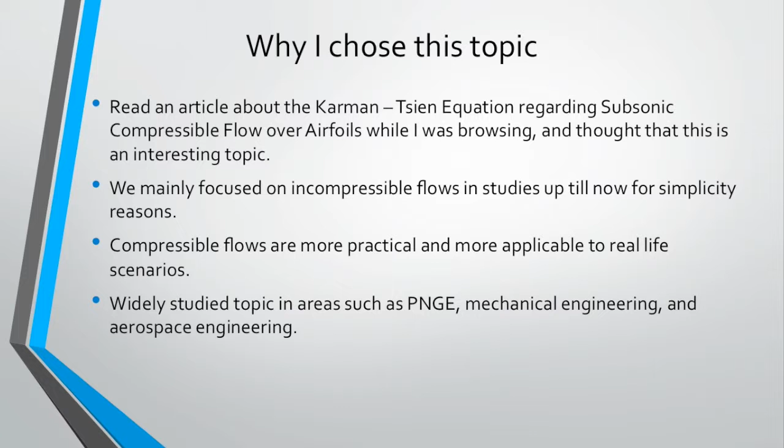Before getting into the study of compressible flow, let's first start off with some background information about compressible flow. Compressible flow, unlike incompressible flow, which deals with fluid with generally constant density, deals with fluid flows that change their density significantly, usually gas. To distinguish if the flow is compressible, one has to look at the Mach number.

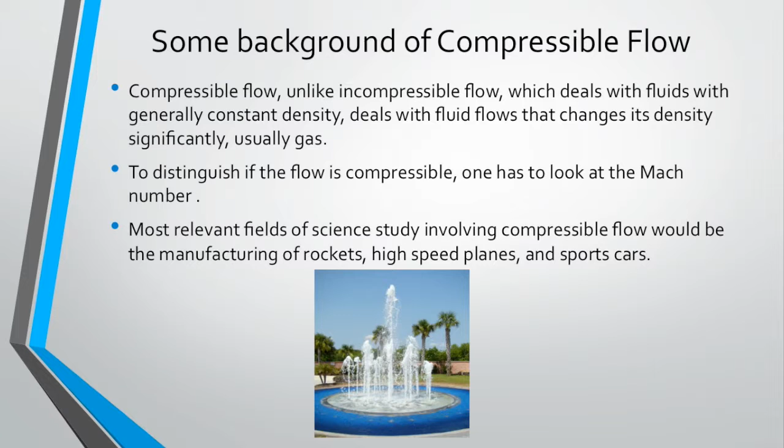Most relevant fields of science study involving compressible flows would be the manufacturing of rockets, high-speed planes, and sports cars. Referring to the picture below, a water fountain was made possible because of the incompressibility of water. If the fluid were changed to a compressible fluid, a water fountain wouldn't exist.

In the previous slide, we mentioned that we will rely on the Mach number to determine if a fluid is compressible or not. The Mach number was a significant contribution of the Czech-Austrian physicist Ernst Mach. The Mach number is a dimensionless number used to express the ratio of local velocity to the local speed of sound. It has an equation of M equals V divided by c, where V represents the local velocity and c represents the speed of sound.

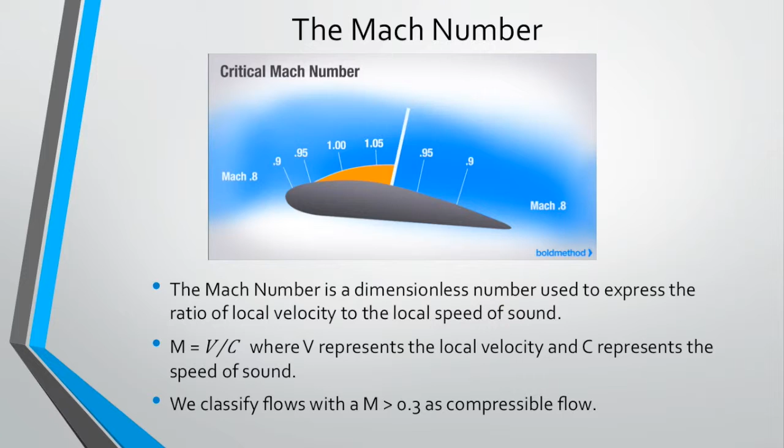Two basic phenomena of compressible flow are choked flow and shock waves. Applications of choked flow are nozzles and diffusers. As we learned previously in class, flows of high and low velocities in nozzles and diffusers are adjusted interchangeably through the restriction of the exit.

Another phenomenon would be shock waves. Examples would be sound waves created by explosions, a high-speed plane passing, and gun firing, when a wave moves faster than the local speed of sound in the fluid, in this case, air.

Referring to the graph on the lower left, a fighter jet traveling at a speed greater than Mach 1.2 would compress the air, since air is a compressible fluid, and then break the compacted air layers, causing what is known as the breaking of the sound barrier. Referring to the graph on the lower right is a classification of speeds of varying Mach numbers.

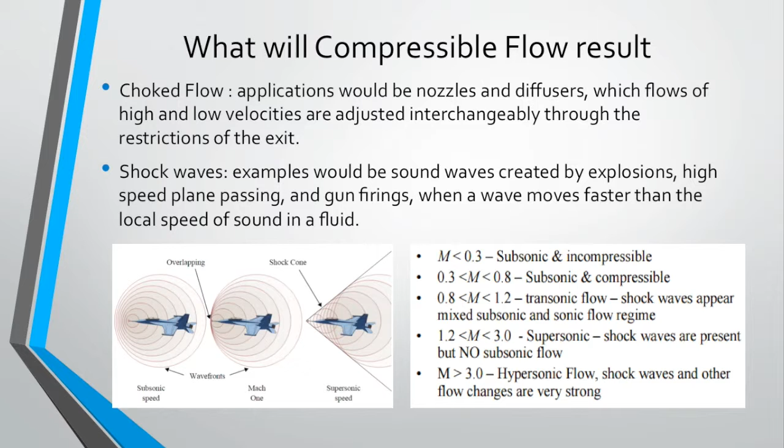There are two general classifications of compressible flow, one-dimensional flow and two-dimensional flow. We will start off with some of the basic ideas of one-dimensional flow. One-dimensional flows refer to the kind of flow that a diffuser or nozzle will give. As we studied in class, the exit of a nozzle has a reduced cross-sectional area compared to the inlet, thus giving the incompressible fluid jet a higher exiting velocity. The opposite applies for the diffuser.

However, when we are dealing with compressible fluid flows, the phenomenon described above might not always be true. Consider the following equation: dA divided by A is equal to dV divided by V times (M squared minus 1), in which dV is the differential change in velocity, A is the inlet cross-sectional area, M is the Mach number, V is the velocity of the flow, and dA is the change of the area of the outlet.

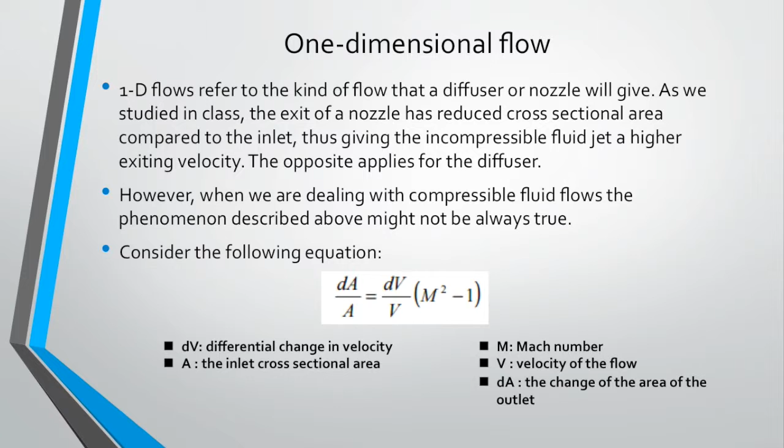According to the above equation, when the flow velocity is less than 1 Mach number, a nozzle will increase the exiting velocity, and a diffuser will decrease the exiting velocity by the following derivation. dV is equal to V times dA divided by A times (M squared minus 1).

For subsonic flows with M less than 1, dA less than 0, dV will be greater than 0. A nozzle will indeed increase the fluid velocity, and a diffuser with M less than 1, dA greater than 0, will result in a dV less than 0, and indeed decreases the fluid velocity.

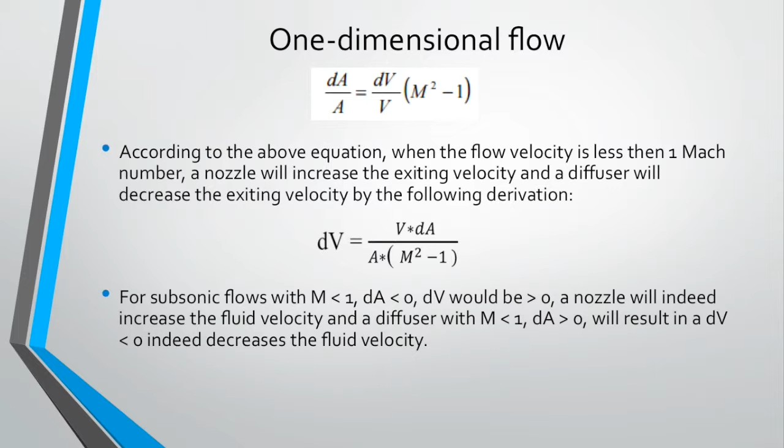However, when we increase the flow velocity from subsonic, which is M less than 0.8, to supersonic, which is M greater than 1.2, the reverse happens. Due to the flipping signs of the M squared minus 1 term in the equation, when a greater than 1 Mach number is incorporated, supersonic flows with M greater than 1, dA less than 0, result in a dV less than 0. A nozzle will decrease the fluid velocity, and a diffuser with M greater than 1, dA greater than 0, and dV greater than 0 will increase the fluid velocity, as opposed to subsonic flow behaviors.

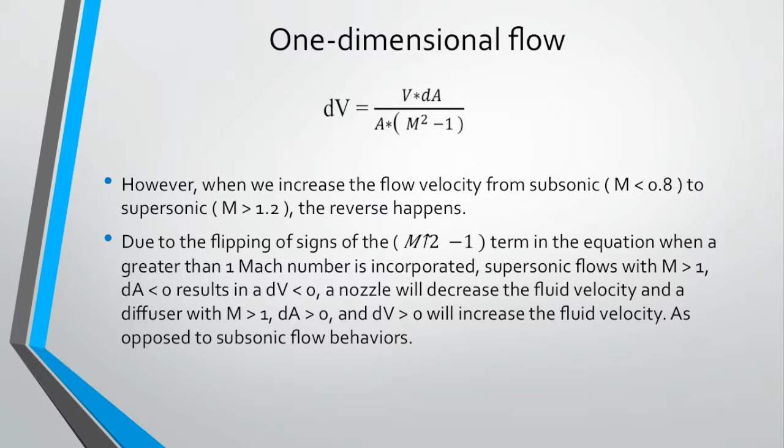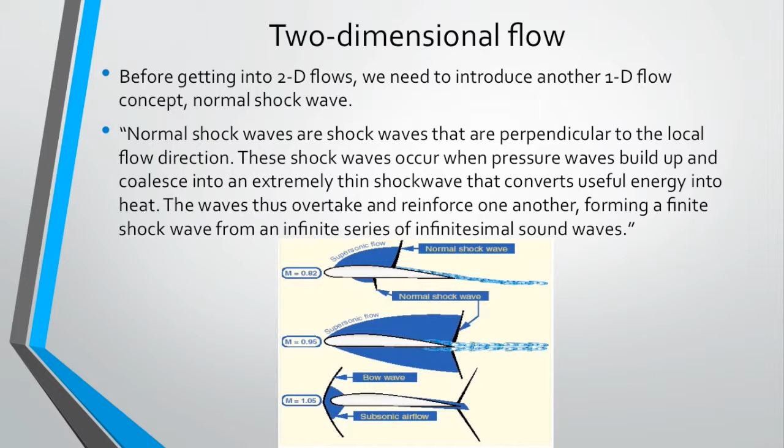Two-dimensional flows are more inclusive. One of the major topics in two-dimensional flows is the oblique shock wave, which the normal shock wave is a subclass of. More commonly and widely studied, oblique shock waves are encountered when, for example, planes travel at supersonic velocities. Practically speaking, there always exist disturbances around objects. Thus, with a non-zero disturbance angle delta shown in the following graph, shock waves become oblique rather than normal.

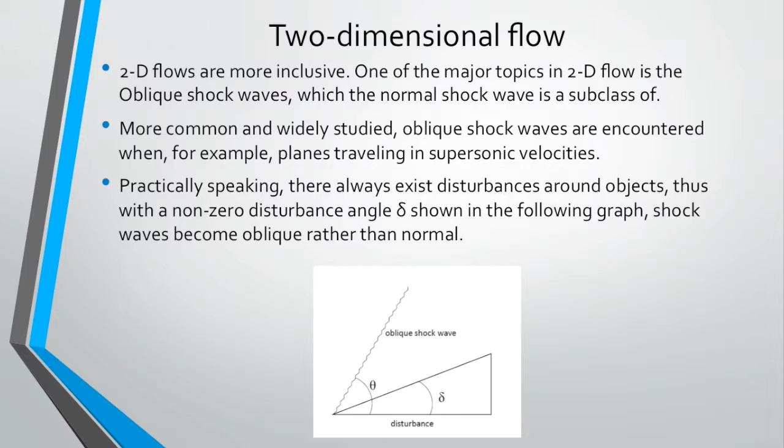Based on the level of flow deflection, oblique shocks are characterized as either strong or weak. Strong shocks are characterized by larger deflection and more entropy loss across a shock, with the weak shocks as the opposite. In order to gain insight into differences in these shocks, a shock polar diagram like the one attached can be used.

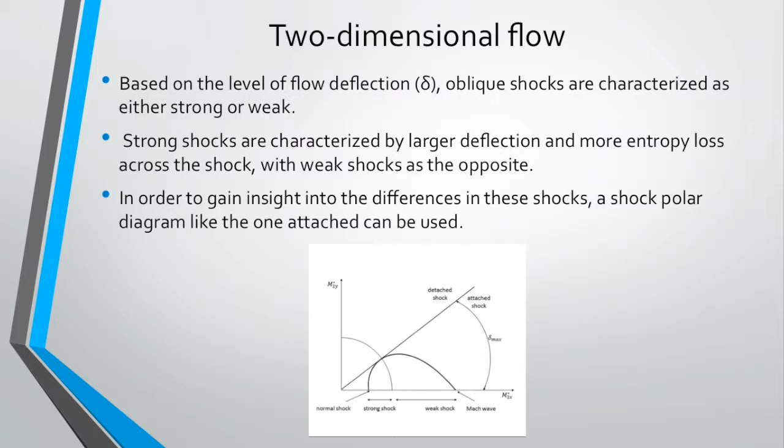With the static temperature after the shock, T*, known, the speed of sound after the shock is defined as A* is equal to the square root of gamma times R times T*, in which A* is equal to the speed of sound after the shock. Gamma is the specific heat ratio, R is the gas constant, and T* is the temperature after shock.

The Mach number is then broken down into x-y components in the Cartesian coordinate system. M2*x is equal to Vx divided by A*, and M2*y is equal to Vy divided by A*, in which Vx is the fluid velocity in the x direction, and Vy is the fluid velocity in the y direction.

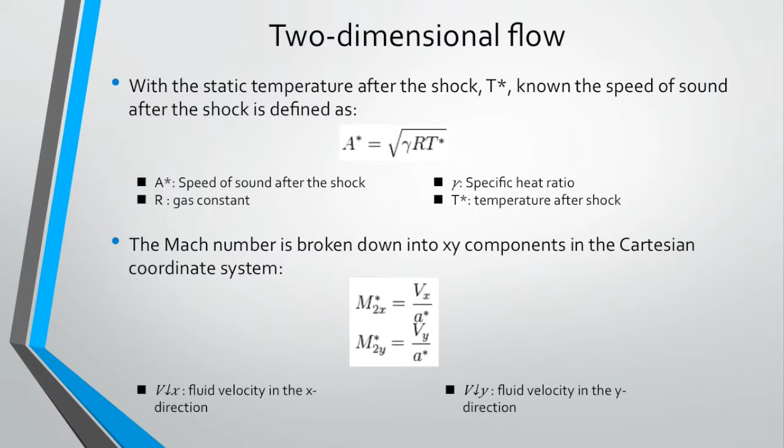So, what are some of the real-life applications of the compressible fluid flow concept? One of the most common real-life applications of the compressible flow concept is the construction of wind tunnels. They're used in the study of the effect of air moving past solid objects. As you can see in the graph attached below, this shows a model with helium-filled bubbles showing path lines of the wingtip vortices in a wind tunnel.

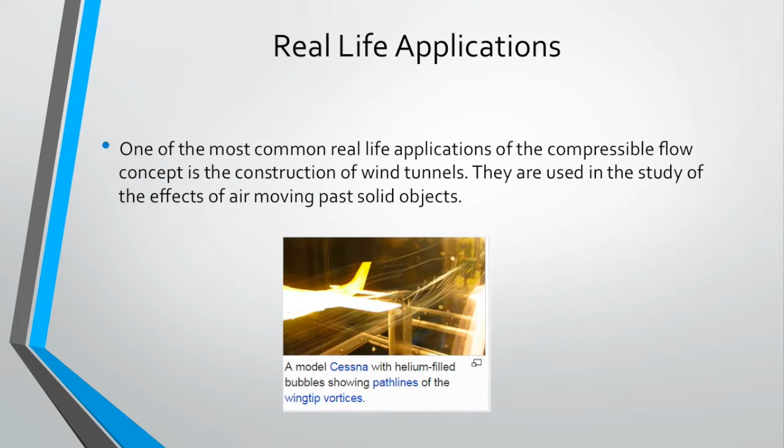Fighter jets also incorporate a very important concept we just discussed. Jets flying at supersonic velocities often adopt the design concept of inlets. These inlets slow incoming supersonic flow before it enters the engine, with the caveat of minimizing losses across the shock.